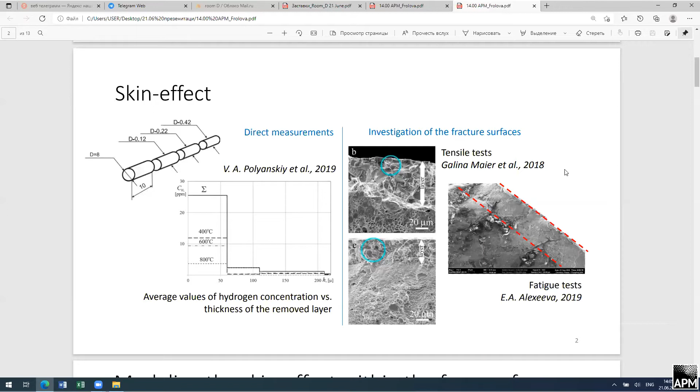According to scanning electron microscope images presented on the slide, we can see that the area containing hydrogen is about 3 to 100 micrometers.

Such a phenomenon of skin effect is sometimes described by considering the material under different kinds of external loading and accounting for aging strains due to hydrogenation. The other type of modeling considers some kind of subboundary layer containing different traps for hydrogen, like cracks, microcracks, pores, and other defects.

However, all these models assume the existence of such a subboundary layer, but they don't describe how it can appear, and they don't model it - they just say that it exists. Here we try to explain and model the appearance of such a boundary layer with a stress-strain state that differs significantly from the bulk material.

We start from the mass balance equation for hydrogen and consider stress-induced diffusion. We assume the diffusion flux consists of two terms: the first due to gradient of concentration, and the second due to an additional driving force. As usual in hydrogenation problems, we consider pressure as the additional driving force. Additionally, we assume dependence of the diffusion coefficient on the elastic strain energy to account for the influence of the stress-strain state on the diffusion process.

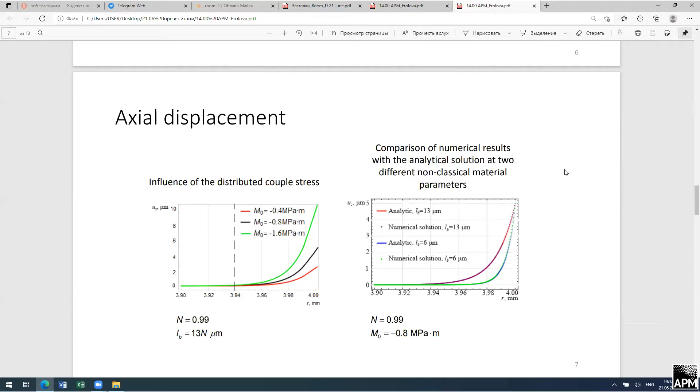According to experimental data, the thickness of the boundary layer was 60 micrometers or less, and here we obtain that it is about 20-30 micrometers. Also, according to experimental data, 60 micrometers contains about 77% of dissolved hydrogen. However, here we obtain that our boundary layer contains all dissolved hydrogen.

So further investigations are necessary to describe a deeper diffusion process. At the same time, values of sample average concentration and surface average concentration obtained experimentally coincide with our theoretically estimated data. So our model describes the real experiment not only qualitatively but also quantitatively.

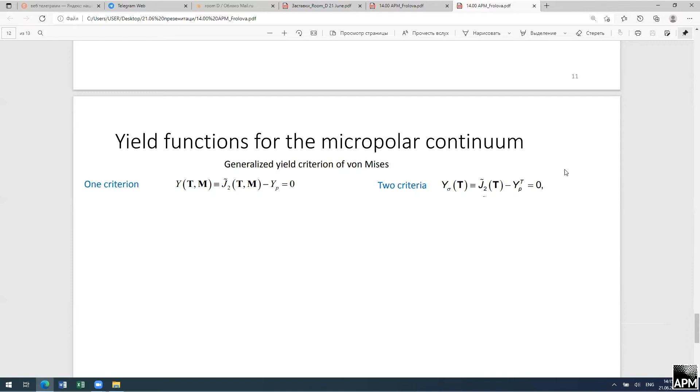According to experimental data, average concentration of hydrogen in materials with smaller radius is higher, explained because the absolute value of the thickness of the boundary layer, in micrometers, is the same in all cylinders. Our model confirmed this fact, and the ratio of average concentrations obtained for a cylinder with radius of 2 millimeters to one with radius of 4 millimeters is in the range obtained experimentally. Finally, it is known from literature that sometimes in metal details one can observe plastic deformations in the vicinity of the border.

So it was of interest to check if micropolar solution, when we have big values of stresses in the vicinity of the border, can lead to such flow, and in this case it also should be accounted for in further models.

Here we use the generalized yield criterion of Mises for micropolar continuum. Usually one criterion is used for couple stresses and stresses, or two different criteria for different stresses.

The main question here is about the material constants present in the intensity expression, and here we use different values from different papers.

However, it was found that all of them lead to more or less the same result, and we obtained that the area where the yield function becomes positive is about 100 to 200 micrometers. Therefore, yes, it's really necessary to account for possible plastic deformations in the vicinity of the border.

Here you can see the conclusions. Our proposed model of stress-induced diffusion in micropolar media allows us to describe the experimentally observed skin effect.

We discussed three skin effects. First is the non-uniform distribution of stresses and strains due to couple interactions between particles. Second is the non-uniform distribution of hydrogen. And the third skin effect is about probable plastic deformation in the vicinity of the border.

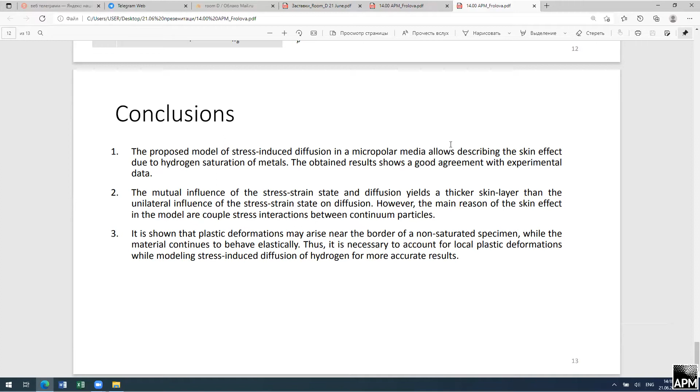Yes, we can hear you now. I have a question: what diffusion mechanism did you take into account in your model? What physical diffusion mechanism did you use? Just Fick's law here.

Just Fick's law. Here we consider the dependence of the diffusion coefficient on the elastic energy, but the law itself is the usual one. Vacancy or interstitial? No, we don't use any vacancies here, so no specific mechanism. Interstitial, yes.

And what about the structure of the material - how do you take into account the presence of intergrain boundaries? Well, here we don't take into account grains or grain boundaries directly, because it's a continuum model.

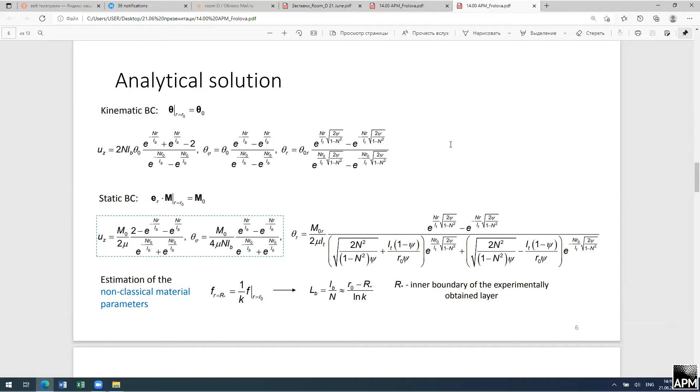So here we account for some specificity of the microstructure only by introducing non-classical material lengths for bending and for torsion. I use only LB for this material length. It is known that this length is about the length of a grain, so by introducing these characteristic lengths we account for the size of grains.

We obtained that it is about 6 or 13 micrometers, which we can say is about half a grain. But we don't use micromechanics models here and don't account for structures containing grains and grain boundaries - we assume diffusion is along grains, but that isn't explicitly presented in the model.

And is your diffusion layer equal to the grain size? Yes, we obtained that it is about the grain size, but initially it was just some value in the equation. Finally, by comparing the solution on the lateral surface with the solution inside the boundary layer, we obtained that yes, its length corresponds to the grain size.

Well, okay, in this case, the next speaker is Morozov Alexander, from the Institute of Mechanics in Berlin, and his report is entitled 'On Stability of Propagating Chemical Reaction Fronts in Elastic Solids'.

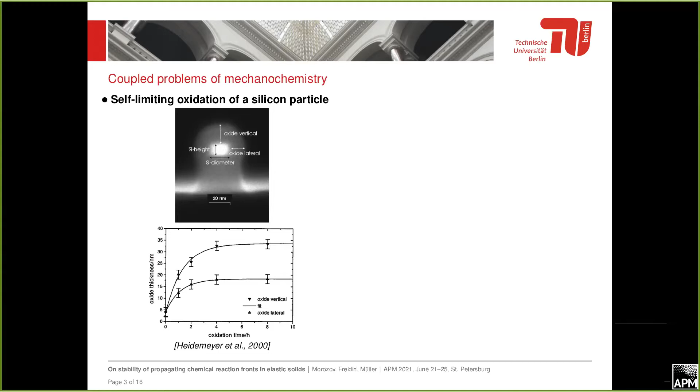So first of all, these problems arose from experimental evidence showing that mechanical stresses may affect chemical reaction fronts. For example, these experiments were observed for self-limiting oxidation of a silicon particle.

Similar problems may occur in other industrial applications related to microelectronic devices such as solder balls and solder ball interconnects, where not only mechanical stresses may affect the growth kinetics of some layer, but also some other stuff like electrical current or thermal gradient.

And finally, the problem with which I have started my dissertation was the lithium-ion battery problem, and then we found a paper which stated empirically that silicon particles due to lithiation, depending on the size of particle, may have some cracks, and of course these cracks are no good for our future lithium-ion battery cell. So trying to understand all these phenomena, we were utilizing the concept which was proposed by Professor Freidin almost 10 years ago.

We consider a sharp interface, the chemical reaction localized to the sharp interface. We assume that our material star diffuses through the material plus, and the reaction occurs at the interface between materials plus and minus. So far, we assume that all the material star which has diffused to this interface is consumed by the reaction.

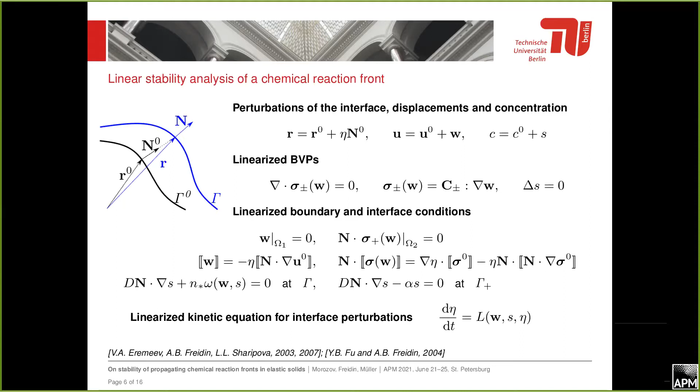So to do so, we introduce our perturbations and then plug them into our boundary value problems. Since our perturbations are small, we linearize our equations, and of course we have to update our interface conditions and boundary conditions, and finally, when we solve our system of equations, we plug our solution into the linearized kinetic equation for these interface perturbations. Basically, eta here is an amplitude of a perturbation, and this is the evolution law for the amplitude of perturbation. And from this solution, we will find out: if this amplitude of perturbation vanishes in time, then our solution is stable. If it grows, then we consider it unstable.

So how to treat all this model? We consider a cylindrical chemical reaction front. So we consider reaction in a cylinder. We apply some load on the external surface of this cylinder. We consider that our chemical transformation is plane, and that was done only for the convenience of the analytical derivations. So it's not a problem to introduce the full chemical transformation involving all directions. So this elasticity boundary value problem is pretty straightforward.

For the diffusion, we consider diffusion only in the material plus, and the boundary value problem for the diffusion is also shown on the slide, and the reaction rate that is coupled is the model which was on one of the first slides. And finally, what we are actually solving is our kinetic equation: we treat our velocity of the reaction front as the derivative of the interface position with respect to time. The negative sign comes from the fact that we always consider the normal vector pointing outwards of material plus.

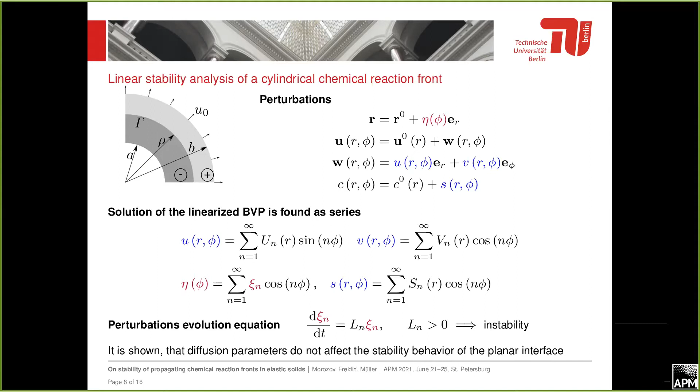By the way, this kind of analysis was also performed for a planar interface problem, and for that case it was possible to show analytically that the diffusion properties of the material do not influence the stability behavior. In other words, only mechanical properties define whether the reaction is prone to be stable or not. Having said this, we want to analyze our Ln's in terms of whether they are positive or negative.

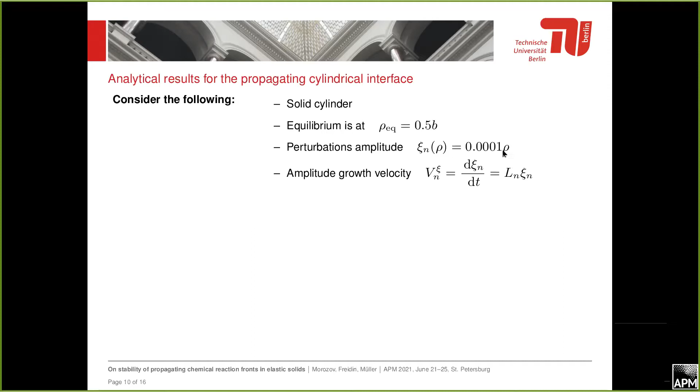And to see what is happening in a stable configuration, of course, we want to plot the ratio between these two velocities. By these two, I mean the velocity of the perturbation, so this index should be xi, not eta, to the global, let's say, kinetics of the interface. And this is basically the solution for unperturbed interface propagating towards the equilibrium.

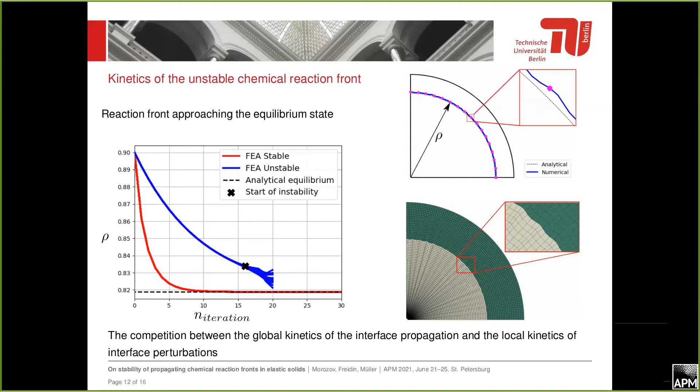And last slide is if we introduce some initial perturbation to our interface in unstable configurations, the shape of the initial perturbation remains, however, amplitude grows during the propagation. And that also fits our analytical prediction. So the unstable interface is unstable at every point, not only at the equilibrium.

With this, I would like to conclude that during this work, a numerical procedure was developed and validated with analytical results. Analytical procedures to analyze the stability of propagating chemical interfaces at the equilibrium and on the way to the equilibrium were obtained for the diffusion problem and for the chemical reaction problem. And of course, this was studied numerically as well as analytically and cross-validated.

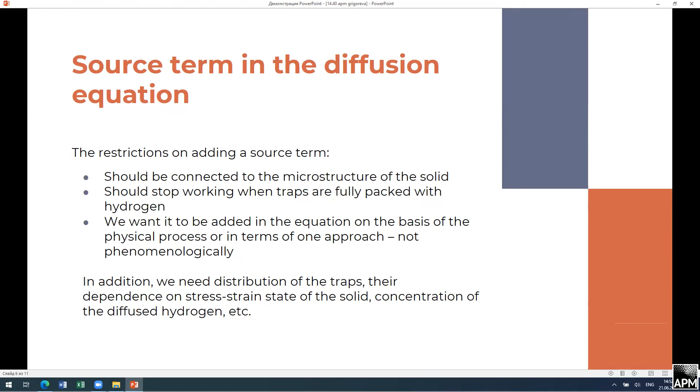So the first idea was to take into account the measurability tensor, which appeared first in works of Polyanski, which showed non-uniform distribution of microcracks and microvoids in metal. So they introduced this tensor studying metal using acoustic anisotropy methods. And basically this tensor is a tensor form of the measurability, which describes how much of our initial surface, what percentage of it, is occupied with

our traps. So what we do, following all the researchers who are studying trap diffusion, we decompose our concentration into the lattice concentration and trap concentration. And thus we can decompose the diffusion flow. And saying that we don't have any equations or laws for the flow in the traps, it's just additional space for the hydrogen flow. We just obtain the diffusion equation with some addition.

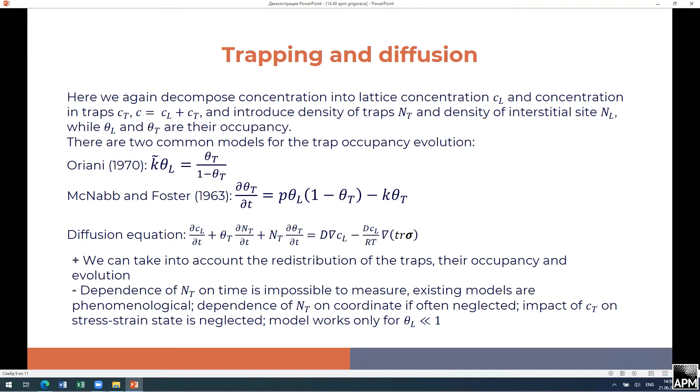And also the Foster equation was proposed only for lattice occupations which are relatively small, pretending that most of diffusion goes into the traps, which is also quite a controversial question, because if we have a boundary layer with a high concentration of hydrogen, the interstitial occupancy would be relatively big, and this model would not work.

So the conclusions and the direction of the research: first of all, these models probably don't describe the experimentally observed boundary layer, but we still have some advantages of every model, and finally we can just build the solutions to be representative enough of these problems of the transient, I mean, at the very beginning of the diffusion.

Another way of research, which was proposed by Freidin, is not to change the diffusion equation, but the boundary conditions, I mean, those for the flux. These ones. So we can introduce some dependence of these constants, or the ability of hydrogen to penetrate, depending on some structural mechanical laws and so on.

Thanks a lot for the presentation, and we have a question from the chat. Comparison with reactive diffusion models. Sorry, could you please describe what you mean by reactive diffusion? Because probably I've seen them, but I just don't know what you mean by them. Anna Georgina, please, can you clarify the question?

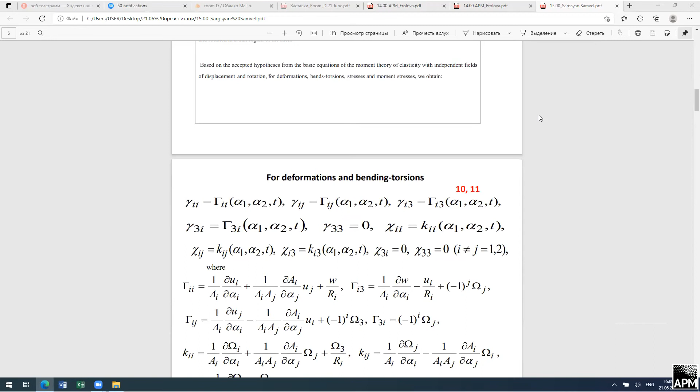Where we have relations 11. For stresses and moment stresses, we have a relation. Please, the next slide.

We have relation 12. Relation 13 are average forces and moments.

General variation principle of the Hu-Washizu type passes equations and boundary condition of the moment membrane dynamic theory of elastic thin shells.

If we take as a basis the Hu-Washizu variational principle for a three-dimensional moment dynamic theory of elasticity with independent displacement and rotation (1), substituting displacement and rotations (9), deformation and bending torsion (10), stresses and moment stresses (12), after performing the integration over z from minus h to plus h, we arrive at the similar principle of the moment membrane theory of elastic thin shells.

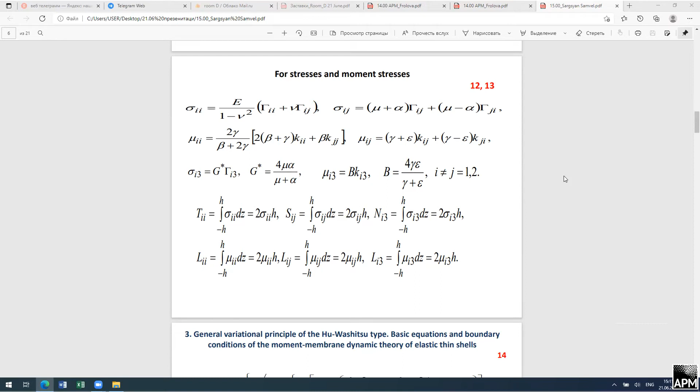Please, the next slide. That is equation 14, where...

A0. Please, the next slide. Where A0 is density of potential energy of deformation.

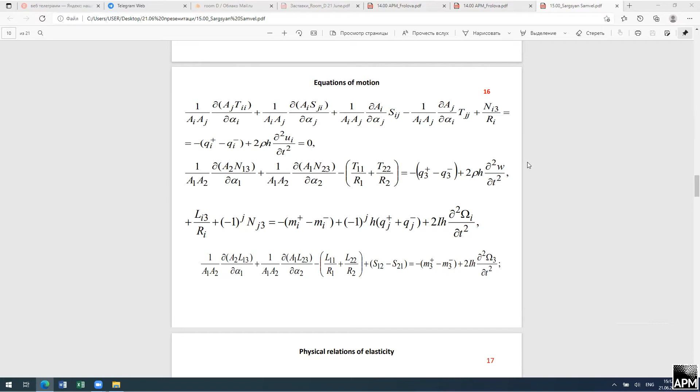The basis equations and boundary condition of the moment membrane dynamic theory of elastic thin shells follow from the general variation equation 14: equations of motion (16), physical relations of elasticity (17), and the geometric relation (18).

Boundary condition 19 and 20.

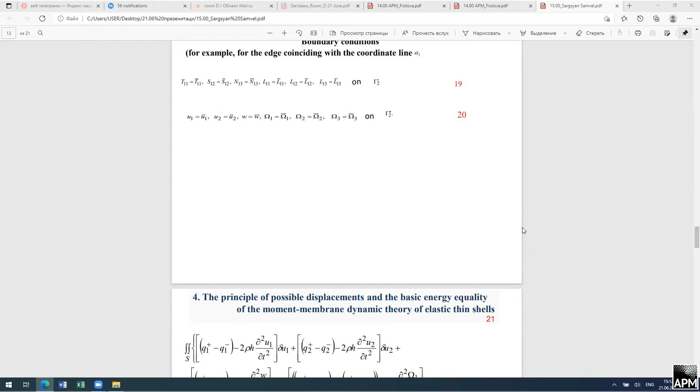The principle of possible displacement and the basic energy equality of the moment membrane dynamic theory of elastic thin shells. That is equation 21.

The variation principle of possible displacement 21 of the moment membrane dynamic theory of elastic thin shells is the basis for the application of variational methods for solving boundary value problems in this theory, as well as for the development of a variant of the application of the finite element method.

We equate the displacement u_i, w and the free rotations omega i, omega 3 at some point in time with those displacement and rotations that at the same point will actually take place over time. In that case, we have 22. Bearing in mind 22, equation 21 takes the form 23.

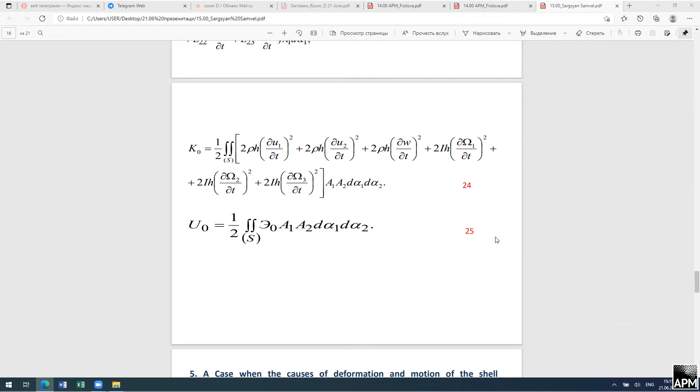Equation 23 is the main energy equality for the moment membrane dynamic theory of elastic thin shells, on the basis of which we accept that the total increment in time of the kinetic and potential energy of deformation is equal to the increment of the work performed by the external forces and moments of the system. This basic energy equation 23 can be used to prove the uniqueness theorem of the solution of the initial boundary value problem of the moment membrane dynamic theory of elastic thin shells.

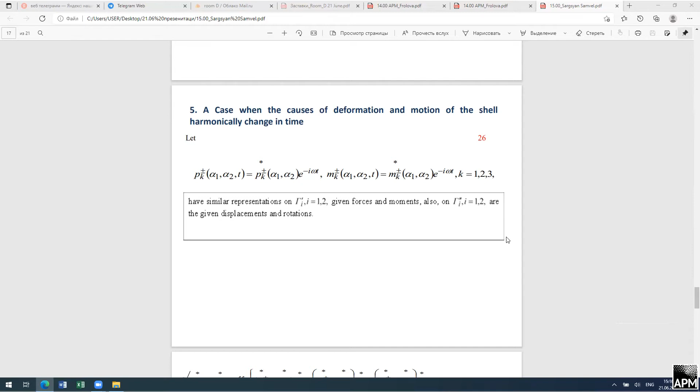In case the causes of deformation and the motion of the shell harmonically change in time. Equation 26. Displacement occurs in the shells u_i.

In this case, the system of equations of motion will take the form, and let us introduce two displacement amplitudes and the rotation amplitude, multiply the equations of motion in turn by delta u_i, delta W, delta omega i, delta omega 3, sum up the obtained equations and integrate over the region S of the middle surface of the shell. After some transformation, we obtain equation 28.

Where, equations 29 and 30. When we suppose that the amplitudes of forces and moments are subject to variation, two variations, we have equation 33.

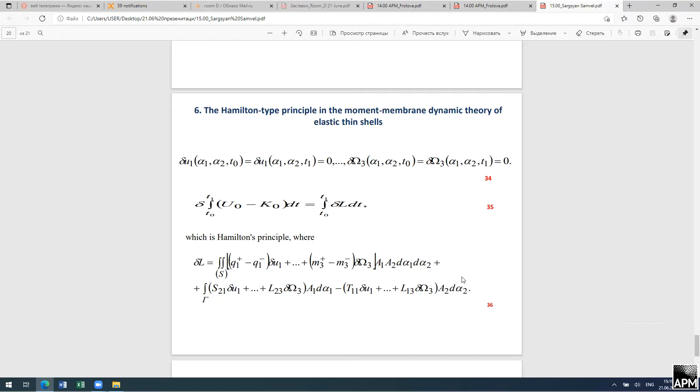Thank you for attention.

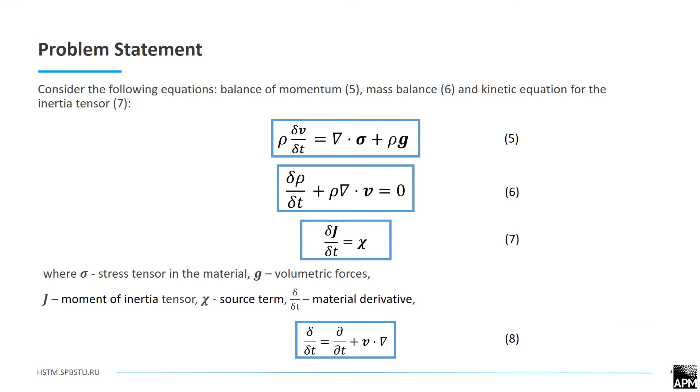This source term corresponds to the different processes in the material, for example when we have some chemical process or some fast transitions, and also when the material is crushed. We use this to describe the breathing process with this equation.

So we consider the viscous material, and also we assume that the viscosity coefficient of this material depends on the moment of inertia, and it depends on the size of particles. And also the important equation here is density.

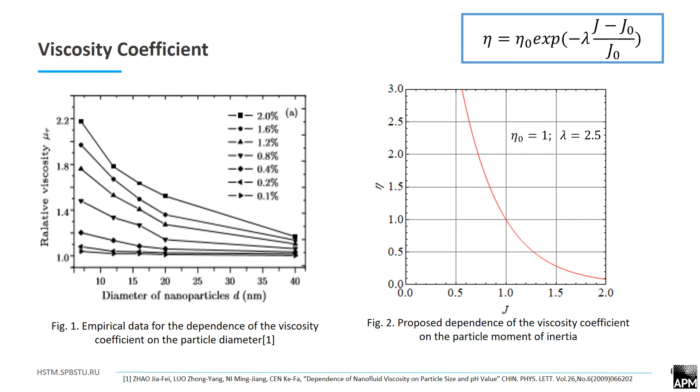Also we assume that at the beginning the particles have the same diameter, the same moment of inertia at time 0, and also we assume that at the inlet surface we have some initial pressure. At the outlet we don't have pressure because the particles go through the free space.

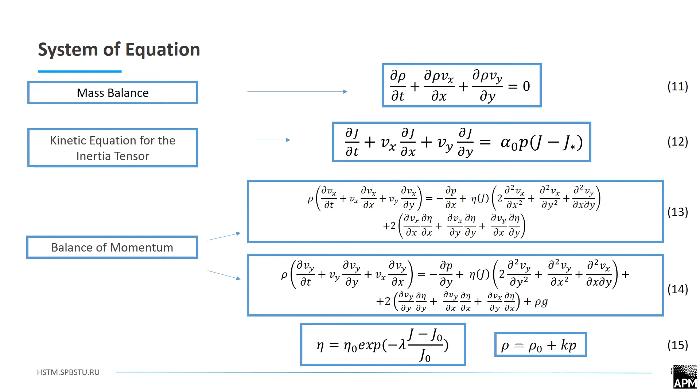So about the boundary and initial conditions, and one more time the system of equations: mass balance, kinetic equation for the inertia tensor, and also balance of momentum.

To solve this system of equations, we use a numerical solution, found using different finite-difference methods and schemes, and we create code using the C++ programming language.

To check our numerical solution, we consider a simple problem called the Poiseuille problem, and compare our numerical solution with the analytical one. Here you can see in this comparison the blue solid line is the analytical solution, and the points are related to the numerical solution.

You can see that this has good accuracy, and that's why we use this numerical solution for our main problem.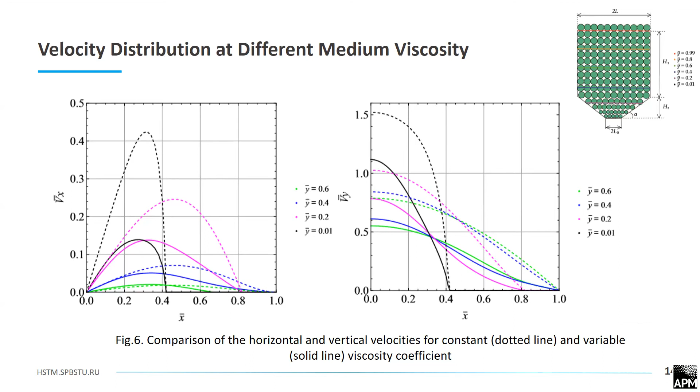So the solid part is related to the variable viscosity coefficient, and the dotted line is related to the constant one. And you can see that there are some differences of 4 or 3 times, and it means that it is very important to understand the relationship between the material properties and the parameters in our problem.

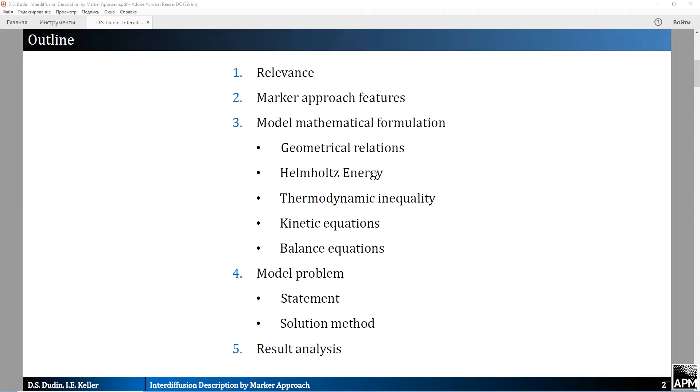Here is the following experiment. An aluminum-zinc alloy sample undergoes intensive plastic strains. During the test, a strong grinding of the grain size and an abnormally fast decomposition of the aluminum-zinc solid solution were observed. The decay rate can be estimated by a diffusion coefficient 8 orders of magnitude greater than the usual thermal one. The goal is to determine this fast diffusion coefficient depending on the usual thermal diffusivities.

Modeling of this process can be carried out in the framework of two approaches. The first of them is the mixture theory, presented on the left side. This theory is based on the hypothesis of interacting and interpenetrating continuums. Thus, the mass balance equations, the momentum balance equations, and all other necessary laws are written for each component separately.

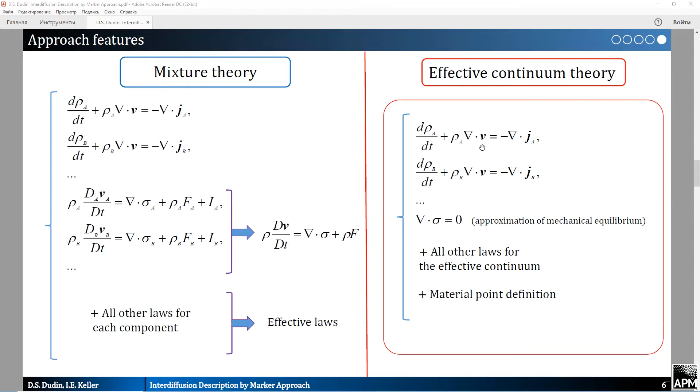It should be noted that the complete equation system in effective continuum theory isn't derived from the mixture theory. It's only possible when the velocity in effective continuum theory is the barycentric velocity. In our work, we will use exactly the effective continuum theory approach. Before using this approach, the main question is to determine the effective continuum particle.

Here and further on, the large omega is the ratio of an actual macroparticle volume to the reference one. There are 5 main definitions of the macroparticle, depending on the selected systems. The first one is the center of mass system. Here, the total mass in the macroparticle volume doesn't change with time. The second system is the particle system. Here, the total number of particles in a macroparticle volume doesn't change with time.

In the Fick's system, a current macroparticle volume always coincides with the reference particle volume. Next is the Hittorf's system, in which it is assumed, for example, that the total number of A particles is constant over time. And finally, we have the marker system, in which the current macroparticle volume is represented by a sum of individual atom volumes.

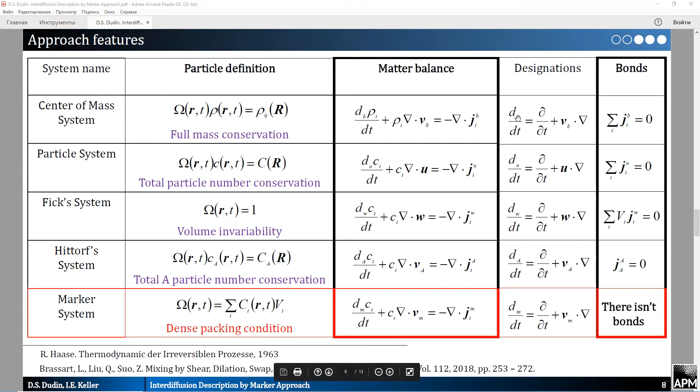It means that when we solve a purely diffusion problem, all these systems are equivalent. But this complete equivalence disappears when the particle strain and correspondingly the stress are taken into account. In this case, a problem solution will differ for each system. Using the particle definitions, we can deduce the following consequences. In the upper two cases, as well as for the Hittorf's system, the corresponding laws of mass conservation hold. In the third case, the W velocity characterizes convective mass transport. Therefore, in the Fick's system, the divergence of this velocity is 0. And finally, in the marker system, the classical form of the dense packing condition varies.

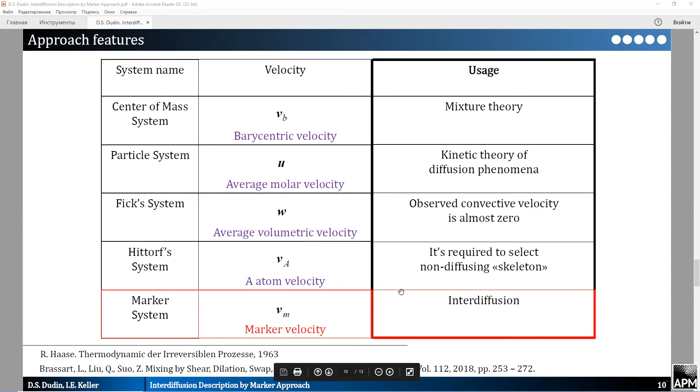All the velocities introduced above have their own practical value. The definition choice of the macroparticle velocities should be strongly correlated with the experimental results. For example, in our case, the marker system, in which the diffusion fluxes are independent, is the best case for describing interdiffusion. A model problem was solved for which we managed to determine the diffusion coefficient located in the red frame. According to its structure, it has the form of a sequential connection of the simplest diffusion elements. These elements are included in the structure with certain coefficients that depend on both the elastic and microstructural properties.

Interdiffusivity D3 has the following features. First, it significantly exceeds the usual thermal diffusivity. And secondly, a prerequisite for obtaining this diffusion coefficient is the assumption of a fine-grained structure. These features are completely consistent with the experiments that I mentioned at the beginning of the report.

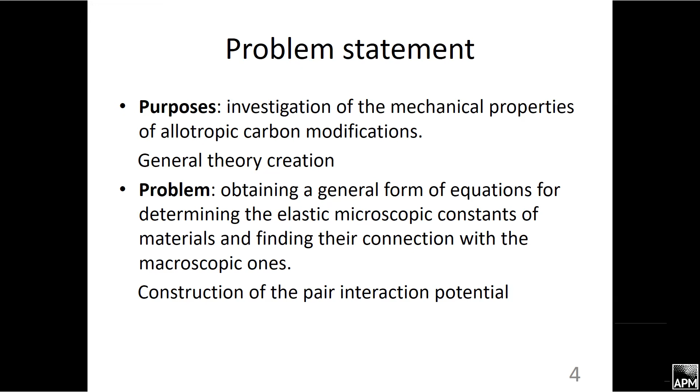Mathematical model: we're going to use tensor operation mathematical models, and from the geometrical properties of the atoms, we want to construct the 4th rank tensors, and we will describe our material by linear relations.

Now, the first type of graphyne is alpha graphyne. In figure 1.1, this is how it looks. The right figure is a simplified model, and the main idea is that the hexagon has a vertex, and in this vertex we have a big atom. In this big atom we have the nearest atoms, and this atom has the biggest mass of these constructions, and we have the beams. One type of beam which will have the two microparameters, CA1 and CD1.

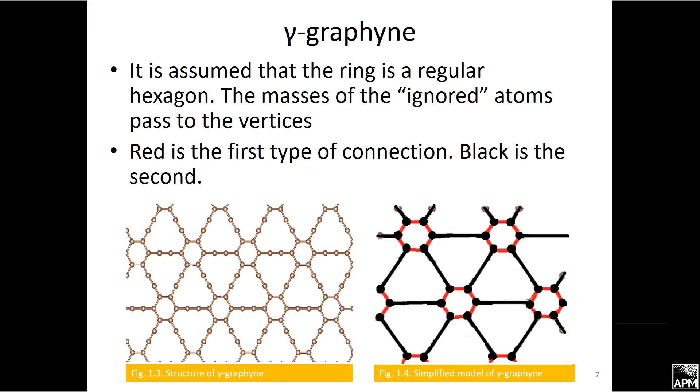Now we want to represent the main formulas. A nu is a tensor of second rank. CA and CD are microparameters, which correspond to the different deformations for different directions.

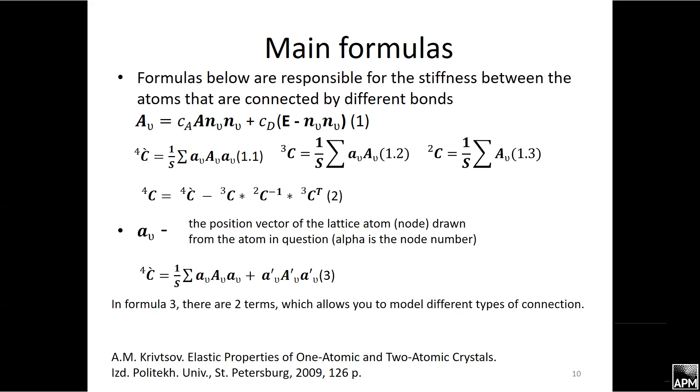This is the definition in formula two brackets, and why we can construct the general theory: because in one fourth rank tensor, I can use other beams, and I can use like terms. For example, if we use gamma graphyne, we have two terms in formula 3. But if it's, I'm sorry, alpha graphyne, we have one term.

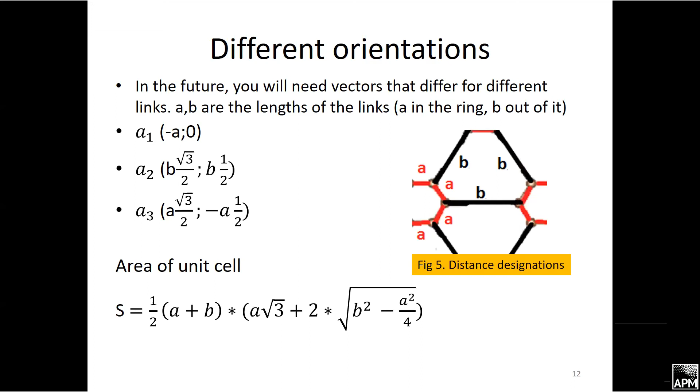This is an example of how the basis was chosen. These are the axes, and in this figure you can see that all of our structure has only these types of nodes. It's the representation of length and a more stable structure, and the area of the cell was found.

And now what have we done? In our model, we already know the value of the Poisson's ratio and the Young's modulus. That's why we have built the functional, and we want to use this functional to find these parameters, because C11 divided by C12 is a function which depends on 4 parameters, and we have only 2 values, and from these 2 values we wanted to know 4 parameters of our functions.

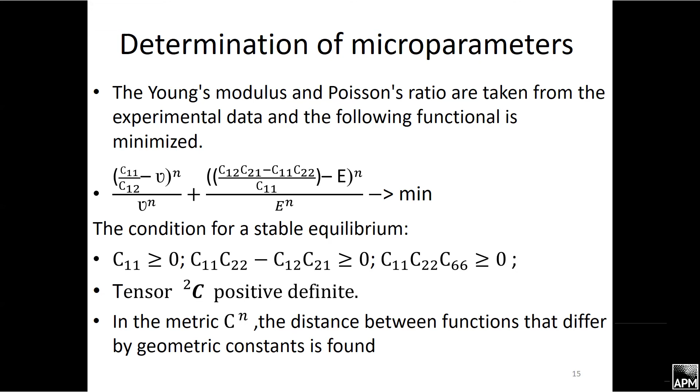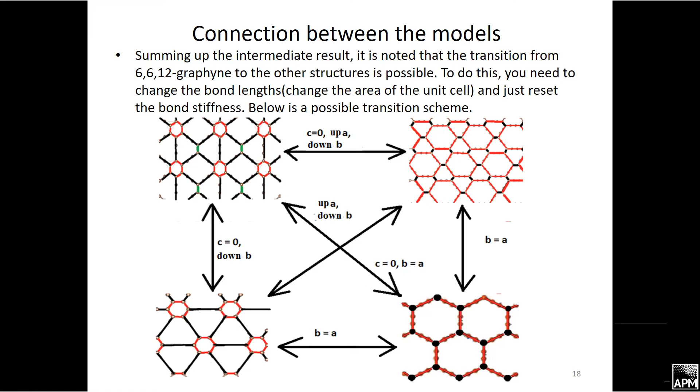Now I should say that the material has an anisotropic symmetry, but in this theory, the material is isotropic. But in the next slides, I'm going to show that it doesn't matter so much, because the difference between the two directions is not so big. Now this is an example of the behavior of the material. It shows us that we can use the linear model. It's the zigzag direction and the armchair direction.

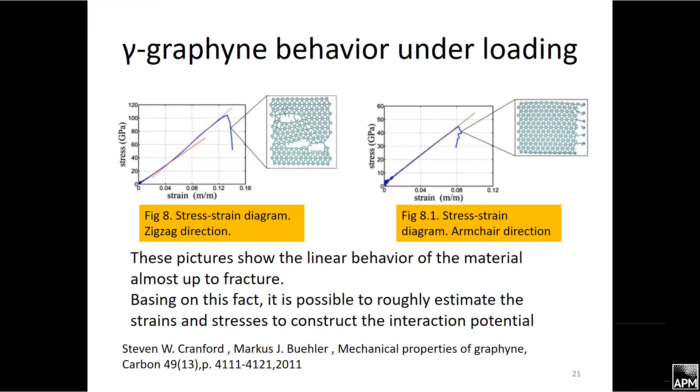In the picture on the right, we can see the places where the connection failed, and we have a sheet with size 10 nanometers by 10 nanometers, with periodic boundary conditions, and that's why we have two walls. In the next step, we found the values and compared them with another article, but the highest stress was in the zigzag direction. If we compare with another article, we have not so big values, and that's why the result that least converged with theory was the stress in the zigzag direction.

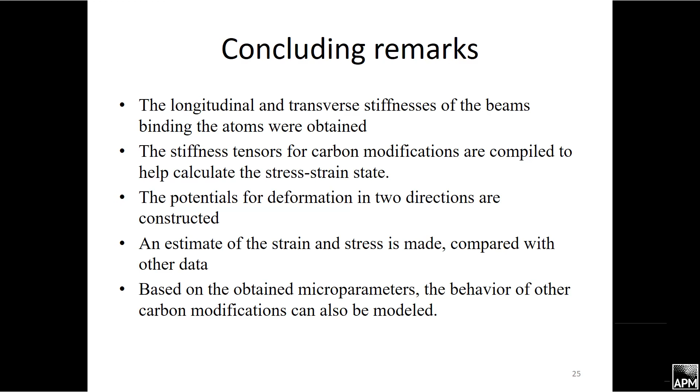For the potential, we have two because we have two directions. Of course, I forgot to say that the potential is a polynomial function in three segments. In one segment the microparameters are positive, in the second segment the microparameters are negative, and in the third segment our connection is zero.

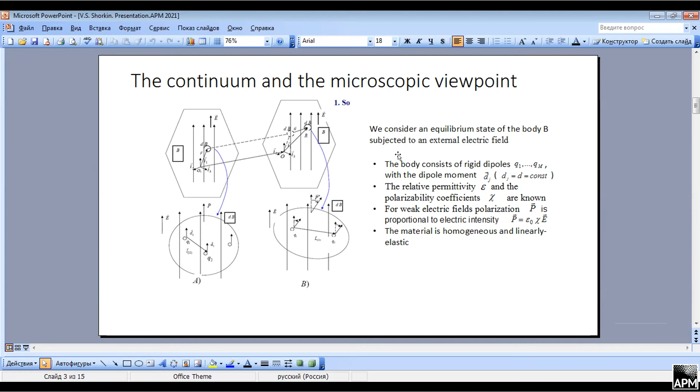The continuum and the microscopic viewpoint. Here we present the idea of describing the properties of a continuum by describing the properties of a discrete ensemble of oriented body points. Here is the transition from the solid body to the particle ensemble b. A continuous body has mass, potential energy, and dipole moment. They are equal to the sum of the masses, potential energies, and dipole moments of the delta B parts.

The mass, potential energy, and dipole moment of the delta B parts are equal to the product of the density and the volume. The density is defined at one of the volume points, here R. Therefore, the product is defined at the same point. So when calculating the mass, potential energy, and dipole moment of a body using integral sums, the values are equal to the mass, potential energy, and dipole moment of a discrete ensemble of oriented body points.

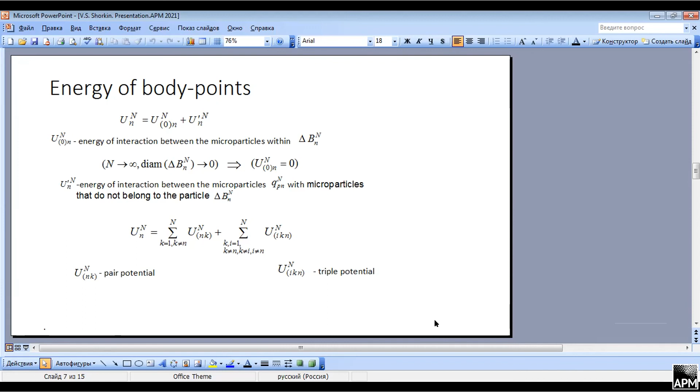Now, locality properties describe the pair and triple potentials. The potential energy distribution density for non-local interactions is given by this expression. Local properties change due to an electric field. We compare the tensor of the material constants of a linearly elastic material in the presence and absence of an electric field. The classical linear model is a quadratic approximation of the dependence of the volume density of potential energy on small changes in kinematic characteristics. The coefficients of this approximation determine the properties of the material.

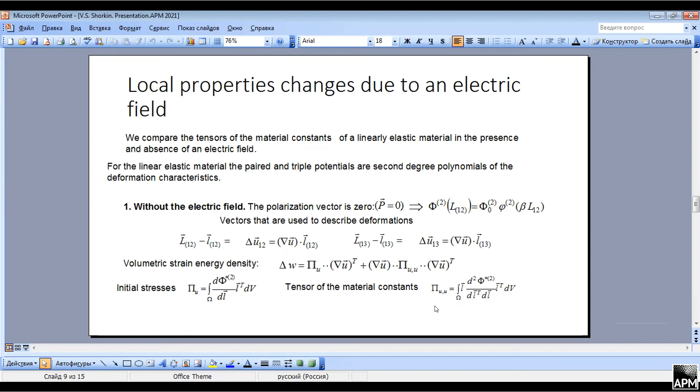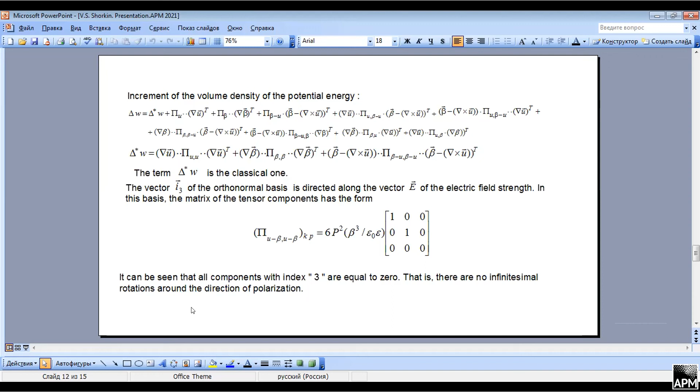Here we consider only one tensor of material properties. It can be seen that all components with index 3 are equal to 0. That is, there are no infinitesimal rotations around the direction of polarization.

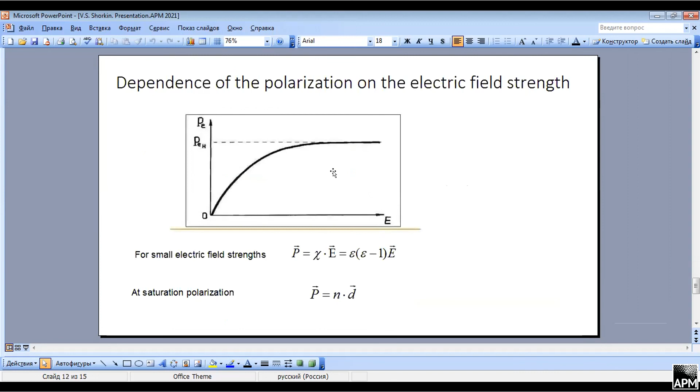In the second case, P equals ND, maximum energy of the orientation interaction of the volume WP is commensurate with phi 0,2. Conclusion: in a strong electric field, polarization can significantly affect the properties of the material. Thank you very much.

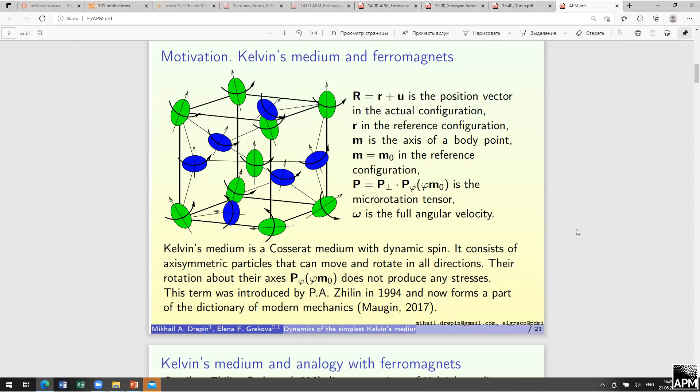Motivation. Kelvin's medium is a Cosserat medium with dynamic spin. It consists of axisymmetric particles that can move and rotate in all directions. Their rotation about the axis doesn't produce any stresses. This term was introduced by Zhilin and now forms part of the dictionary of modern mechanics. There you can see some analogy between Kelvin's medium and ferromagnets.

And so on. Okay, motivation. We want to introduce reduced media because it is a single negative acoustic metamaterial with respect to those shear rotation waves which are polarized against the spin rotation. Acoustic metamaterials have anomalous wave properties. They are used for various applications.

Nonlinear stress state in the reduced and full Cosserat medium changes the effective elastic constants and influences wave propagation and stability, providing a new way to lose the stability of the material. And finally, constitutive equations of Kelvin's medium are a specific case of the Cosserat medium, and the dynamic term is different due to gyroscopic effects. And the main question: what will happen for the simplest reduced Kelvin's medium in the nonlinear prestressed state?

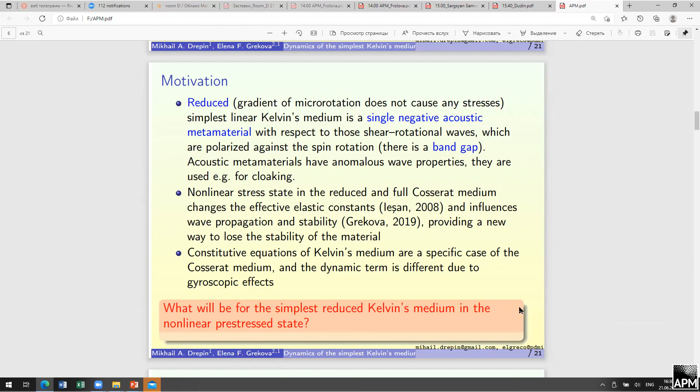Constitutive equations for the reduced Cosserat media we will use in Zhilin's form. For reduced Kelvin's media, the strain energy depends only on those strains that don't include gradient P. We choose U as a function of G and gamma, tilde gamma. You can see them. They include all independent strain measures according to Grekova, Zhilin

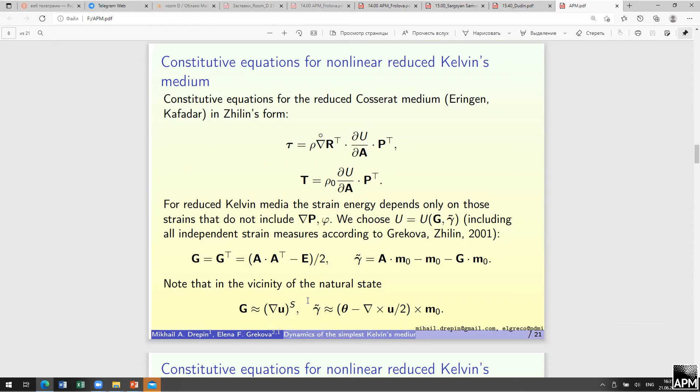Note that in the vicinity of the natural state, G and gamma are equal to the linear strain tensors. So after some tensor algebra, we obtain our tau and T. So we consider a physically linear, but geometrically nonlinear medium.

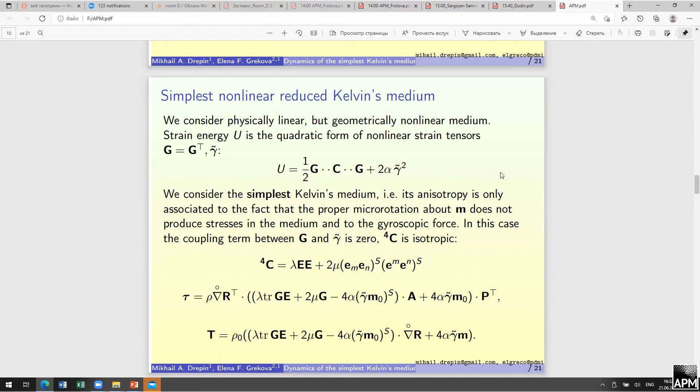Strain energy is a quadratic form on the nonlinear strain tensors G and gamma. G is a symmetric tensor, and there is no term with G and gamma because of the isotropy of our medium.

Okay, so we have this form for tau and this form for T, and now we make some linearization near our stress state, prestressed state, and our type of deformation is spherical deformation. You can see that it's compression or tension, and there are no rotations.

So we have stresses. So we have TS, T1, subindex S denotes quantities in the nonlinear spherical strain state. And we will use the gradient operator in the pre-stress configuration, nabla S.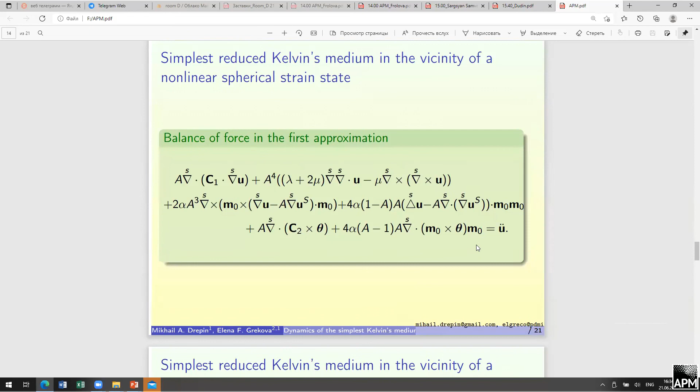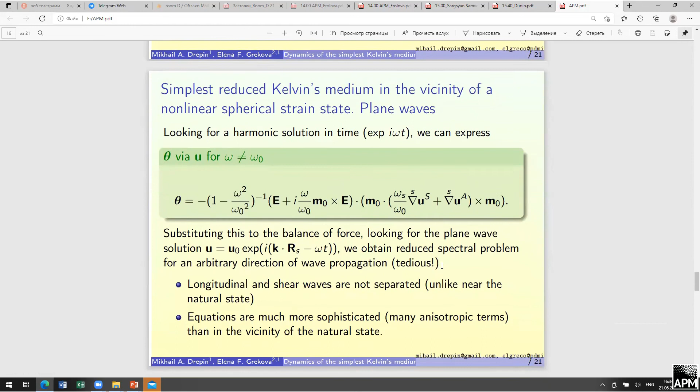Okay, looking for a harmonic solution in time, we can express theta via U. So from the balance of moments, we can substitute this into the balance of force, looking for the plane wave, but it's very tedious and not easy.

But we can say that longitudinal and shear waves are not separated, unlike near the natural state, and the equations are much more sophisticated than in the vicinity of the natural state. But we can have a look at plane wave propagation along dynamic spins.

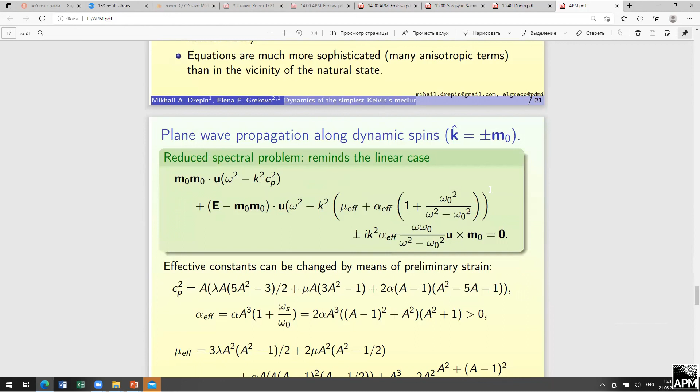For K equals plus or minus M0, so reduce the spectral problem, and here we write some effective constants. It's not Lamé coefficients.

And finally, let's talk a bit about stability. We don't know if the medium is stable with respect to perturbation of some kind, but if we find instability for this motion, the medium is unstable. Classical physically linear elastic isotropic medium is unstable under strong hydrostatic compression.

It doesn't resist shear perturbation. But elastic isotropic Cosserat and reduced Cosserat physically linear media either don't resist shear perturbation under high hydrostatic pressure, and in addition can be unstable under strong spherical tension, not resisting rotation perturbation. And the simplest Kelvin's medium isn't isotropic, but it is close to this. So the dynamic term is different, and how it will influence the stability under spherical strain is a question.

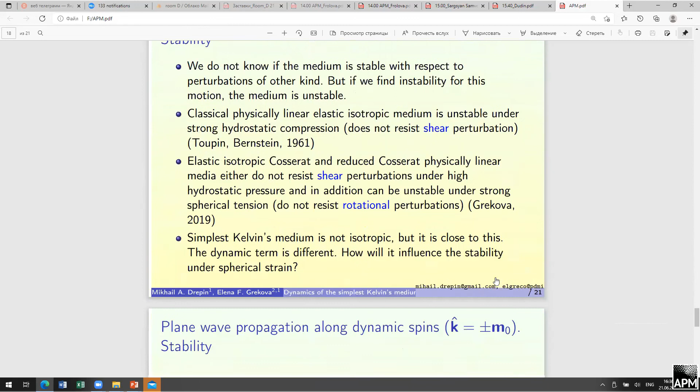Plane wave propagation along dynamic spins: we have non-dispersive P waves and a dispersive shear rotation wave. The medium is stable.

Now, our preliminary results: it's a new mechanism of instability. The mechanism may exhibit instability under high spherical deformation, and contraction or tension depending on elastic constants with respect to volumetric perturbation. There is no such mechanism for classic or Cosserat media.

And also there's another mechanism of instability. It may also fail under high contraction, becoming unstable with respect to shear, always if R is less than 0.15. Okay, plane wave propagation along dynamic spins.

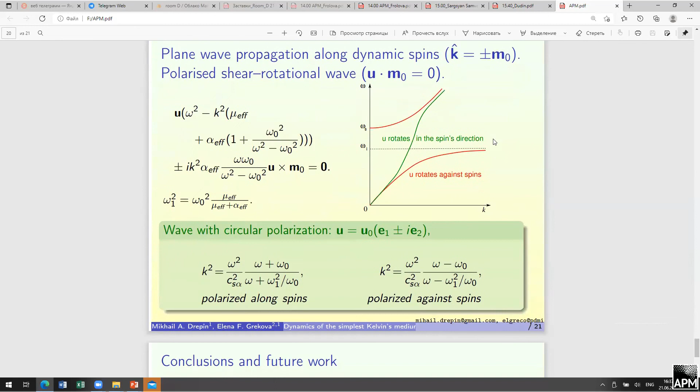We can see some branches on the graphics. U rotates against the spins, and U rotates in the spins direction. So this equation describes waves polarized along spins and polarized against spins.

Conclusions: we obtained basic equations of the simplest nonlinear Kelvin's medium. We have coupled waves in the vicinity of the nonlinear spherical strain state, in contrast to the linear case, and wave propagation along or against spins, P waves are non-dispersive, may lead to the instability of the material under tension or contraction.

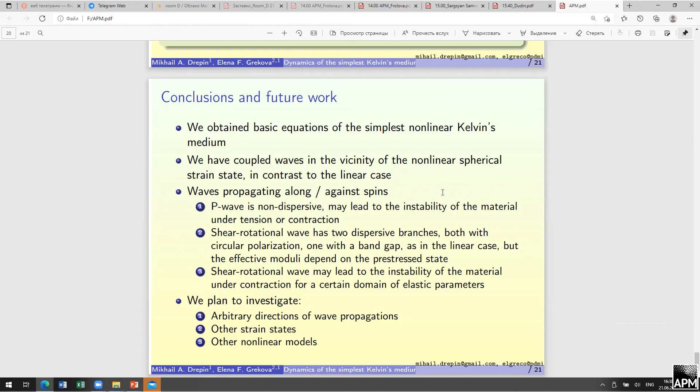Shear rotation wave has two dispersive branches, both with circular polarization, one with a band gap. You can see it. As in the linear case, but the effective moduli depend on the pre-stressed state. Shear rotational wave may lead to the instability of the material under contraction for a certain domain of elastic parameters. We plan to investigate arbitrary directions of wave propagation, other strain states, and other non-linear models.

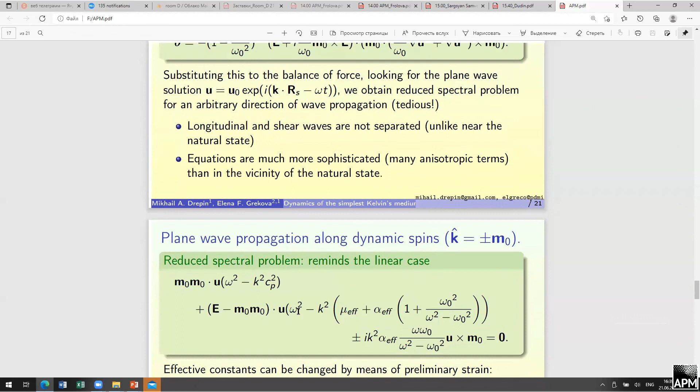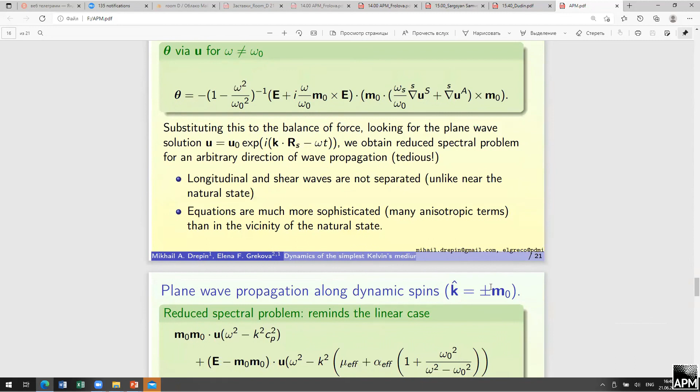Okay, first of all we have balance of force and balance of moment. From the balance of moment, we find theta via U, micro-rotation, yes, and put it in the balance of force. And now we just want to look at U in this form with K equal plus minus M0. And after calculations... Okay, so you have calculated it.

Calculated, yes. And do you have any numerical or experimental comparison for the modeling, just to understand if it is correct? No, not now. It's in work, and it's our future.

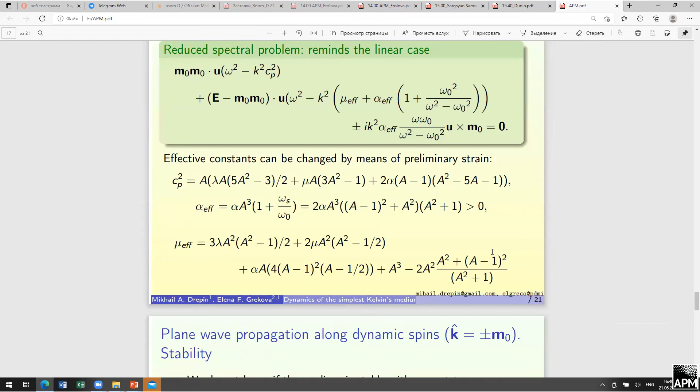Just because of the symmetry, it's easier, and it's a new way to obtain media near some state, because of the symmetry.